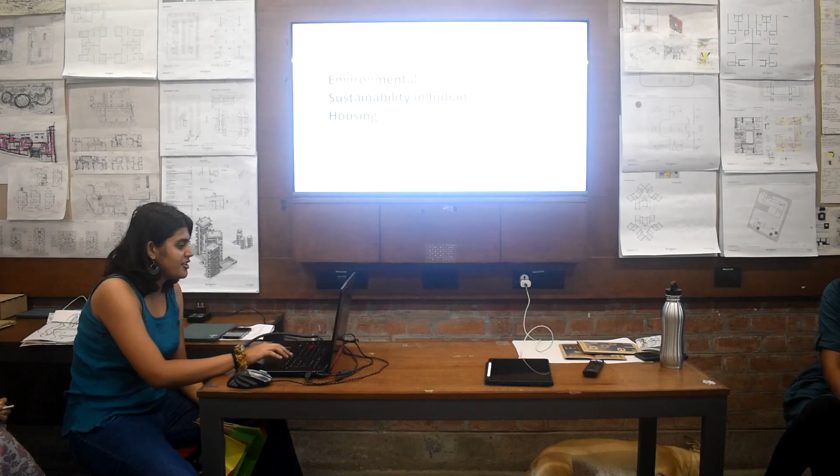Everyone, I'm Sanjana and today my seminar would be about environmental sustainability in the Indian housing context.

The future is back. Architecture, which has been a bit out of focus lately, is once again alert. Sustainability came to the rescue, setting goals, objective tasks and challenges, and the new paradigm is readily absorbed. Architects can save the world again. They advertise their sustainable practice and ecological design. Schools offer master courses in sustainable design, while the building industry provides sustainable solutions and governments compete in a contest of sustainability politics. Sustainability has become a politically correct term, a label that makes whatever you want to do acceptable and good. No question asked and no doubt involved.

So when we look at housing in specific as a building typology, we have three stakeholders in any project: the client, the designer and the end user. But in terms of housing, we have the developer, architect and resident.

What is important in the case of housing is the relationship between these different stakeholders, because say for example in a school or a museum, the end user does not associate the project as home, or it is not so sacred to them. But when you talk about housing or a home, it becomes more important, because for the end user, the resident, they are buying a commodity of an apartment or a house for themselves.

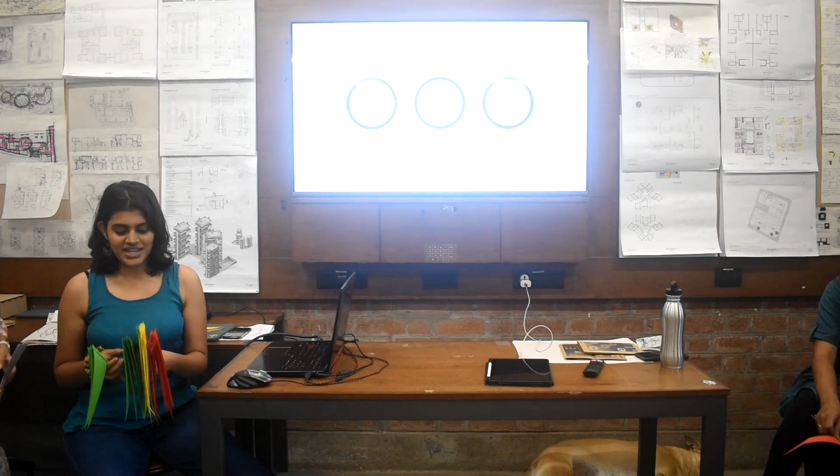So for the sake of this presentation, I would like you guys to align yourself with either being a developer or being an architect or being a resident. Just take one and pass on each color.

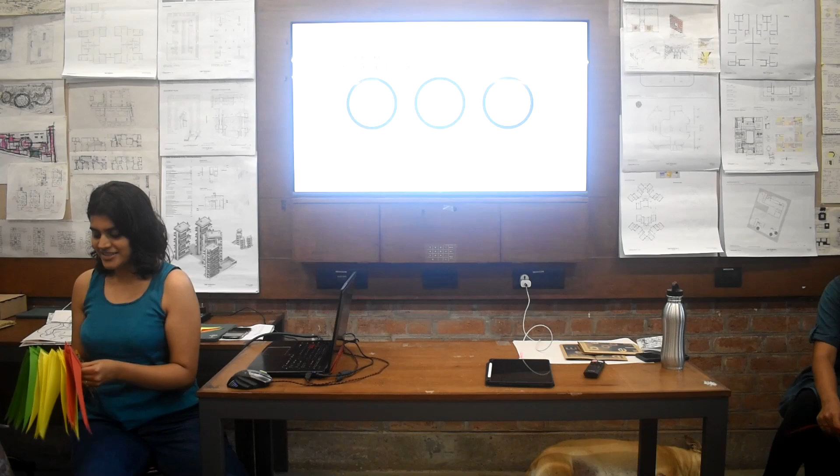And what is important is, when you think like a developer, you think like a business person. It is your business that is going to go into loss. It is you who is going to face the loss and the profit. Can you take one and pass? And you need to have one of each color.

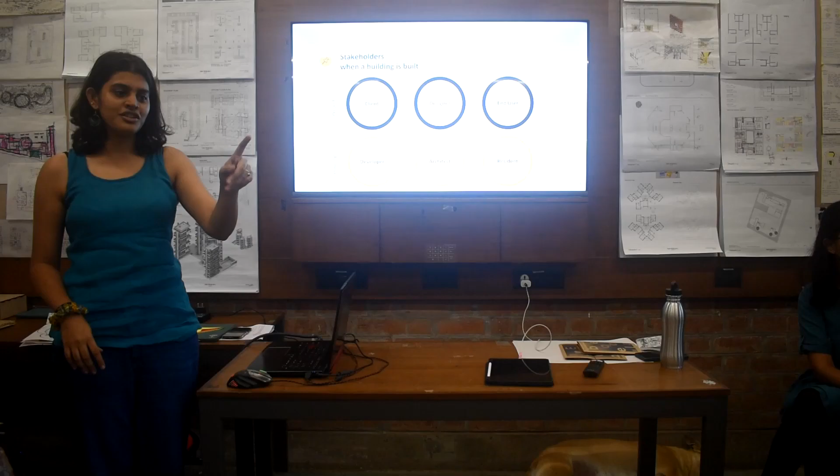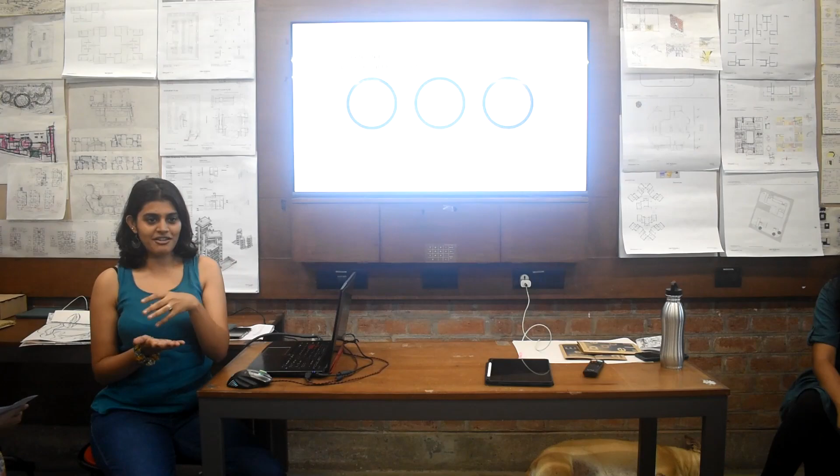When you are an architect, one of each color. When you are an architect, you are thinking as a designer who is designing a housing complex. And as the resident, I want you guys to think as the closest non-designer family member you have. So say your parents or your grandparents or your family members, and if they would be okay with this idea of sustainability.

What is your role? A developer is typically an individual or entity responsible for the financing and overseeing of a project. An architect is someone who designs buildings and structures that are not only aesthetically pleasing but functional, safe and in compliance with regulations. And the resident refers to an individual or family who will eventually live in one of the housing units. So for example, if I have bought a house in Omaxe Heights in Lucknow, Omaxe Construction is the developer, CP Kukreja is the architect, and I become the resident or the end user.

When we look at environmental sustainability in an Indian housing context, to make it a success, there are three basic criteria that it needs to fulfill. The practice or the system needs to be environmentally sustainable, it needs to be economically viable, and it needs to be socially acceptable by the three different stakeholders that are there.

If there are less number of flags, we can share.

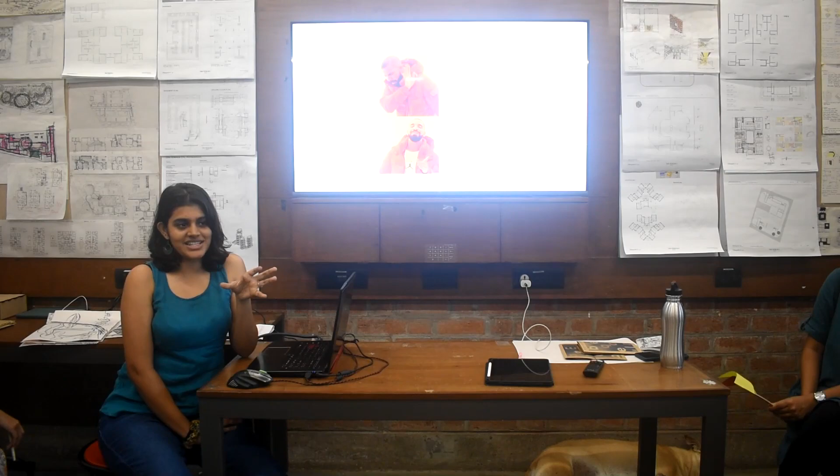When we talk about social acceptance, how the residents look at social acceptance is very different from how an architect or a developer look at social acceptance. So for example, for a developer, sustainability has become like a replacement of an amenity, or it has become like a selling point of a project. While as architects, we feel that sustainability is something which is either too serious a topic to deal with, or a topic which makes us more morally correct or politically correct. But when we look at the resident, we're not sure if they really agree to or they care about sustainability or environmental sustainability, specifically in the housing context.

When we talk about economic viability, this is just an example. So 40,000 to 70,000 per kilowatt is the price for installing solar panels in a housing complex of 50 units in India, and we produce about 1 lakh to 3 lakh kilowatt hours per year.

So when we look at economic viability, the developer is financing a project, and the resident is the person who has to take care of the maintenance of the system, or the cost efficiency when it comes to repairs or damages of a sustainable system, while the architect is of course someone who's designed the system but is not economically affected by it.

These are just types of certifications in India that we follow: the IGBC, the GRIHA, LEED, or ECBC system, where buildings are given points according to different sustainable ratings, and then they are certified based on how many points they collect.

So now I will be showing you three different projects, and I want some of you all to do the role play of a developer. So can I just have a show of hands of how many of you all would like to look at these projects as developers?

Okay, as architects? Okay, and as residents? So again, just a reminder: when you're thinking like a developer, you think about a business person and not about the aesthetics of the building, if you want to. As an architect, you think as a designer, someone who's designing the project. And as a resident, you relate to the closest non-designer person that you know.

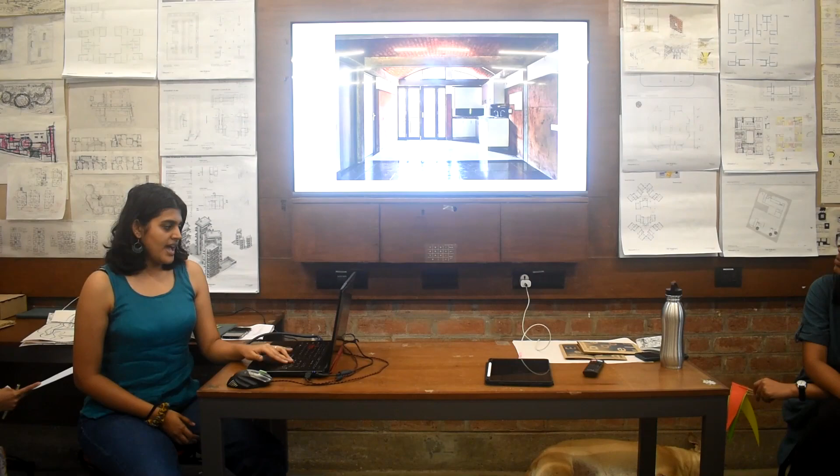This is Humanscape in Auroville. It is a non-certified sustainable project that has integrated urban living. It is a mixed-use development that uses a lot of passive techniques and technologies to promote sustainability. It deals with a good water management system, and apart from environmental sustainability, it emphasizes social sustainability, where the house dwellings do not have private bathrooms, but have more common spaces. There are a lot of common community spaces. For example, a 4 BHK in this project has 2 common toilets, and no individual toilets attached to the bedrooms.

So for this project, if you are aligning yourself as a developer, these are the probable key points or information you should keep in mind if you are saying that you would build this project. A green flag is a yes, red flag is a no, and yellow flag is a maybe or ambivalent.

So as a developer, you would get awards and recognition in Auroville, higher profits for the context, but some residents might question the lack of certification, and you would have to pay 15% more construction costs without any certification from the agencies. So as a developer, would you build a project like Humanscape?

Right now it's just developer. You're asking developer? Yeah, as a developer. Are there any green flags? No.

Okay, as an architect, would you design a project like this where you would get awards in addition to your portfolio, moral fulfillment of responsibility towards the society?

Okay, any red flags? So you wouldn't design a project like this as an architect? You are trying to influence it.

Okay, and as a resident, you would have to pay a higher price of 10% for a non-certified sustainable project on the word of the developer and an architect. There would be a 4 BHK with no attached bathrooms, a lot of shared amenities and community spaces, and maintenance charges, etc. So would you buy a house in a project like this?

Are there any green flags?

The next project is Park West by Shapoorji Pallonji. It's designed by RSP Design Consultants, in Bangalore. It is an IGBC certified sustainable project that uses a lot of energy efficient systems and a lot of green pockets and sustainable materials so that the embodied energy of the building is lower. It also has amenities and shared spaces, with a lot of green pockets to reduce the heat island effect in a city like Bangalore. It is also deemed to be the example of a sustainable project in the cityscape of Bangalore.

So as a developer, would you build a project like this? You would get higher profits for a certified project. You would have to pay 5% more of the construction cost for the process of obtaining the certifications, and there would be awards and recognition for doing a sustainable development in Bangalore.

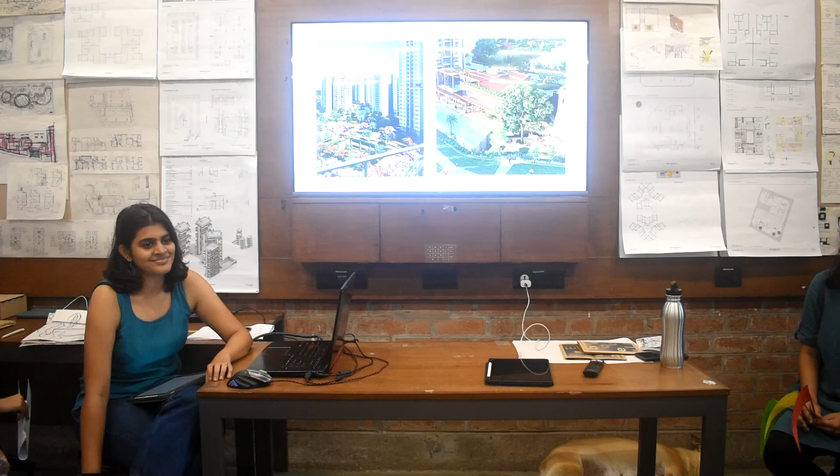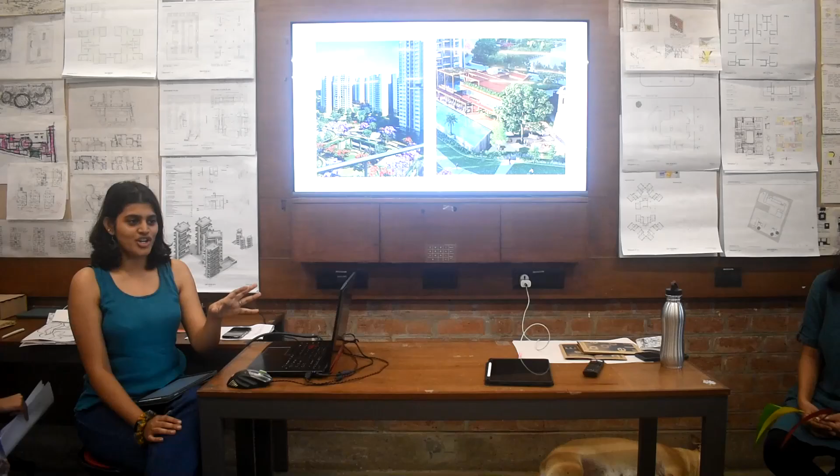So I had also done a survey about whether people would be okay using grey water recycling to wash their cars or water their plants. Every non-designer I asked would not be okay with it. In fact, when I told my father, the closest non-designer resident I know, he was absolutely against the idea of recycling grey water for washing the car or watering plants. So I think as designers, the way we look at sustainability, or the tangible systems we might be okay with, a lot of residents do not think about it that way, because they are paying for a commodity of a house or an apartment. They look for their comfort, or what they're getting out of it, at the topmost level of priorities.

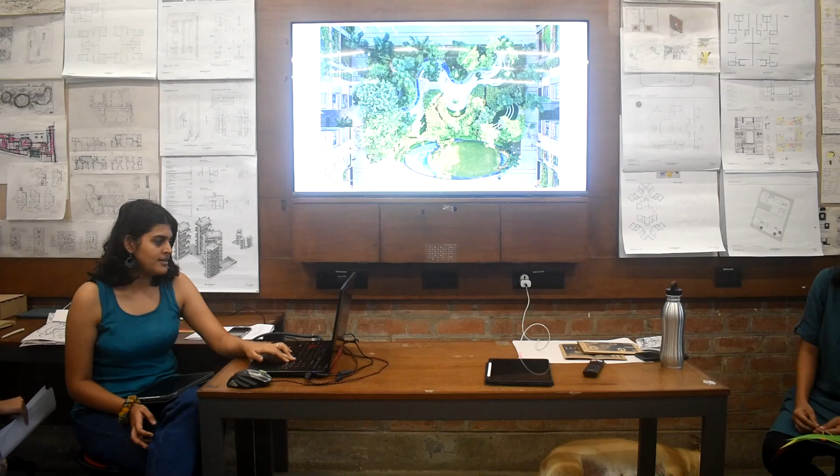This is the third project, the Urban Oasis in Ahmedabad, by Grid Architects. This is also an IGBC certified building, and it endorses and encourages community living. At the same time, it reduces carbon footprint and uses a lot of energy efficient systems. It has four blocks: north, south, east, west. The north and south blocks are the taller blocks, and the east and west blocks are comparatively shorter. Right in the middle of these four blocks there is an ecological garden that they have maintained, with all the native tree species of Ahmedabad. On a normal day, on a silent afternoon, you would hear birds chirping and water trickling down the stream that is there.

So for this project, as a developer, would you build a project like the Urban Oasis? As an architect, would you design a project like Urban Oasis? And as a resident, would you buy an apartment in a place like Urban Oasis?

So the percentages are different in different projects. Yeah, it's also based on the scale of the projects. You wouldn't buy - yeah, 25%. Why wouldn't you? It's 25% more than... yeah, it's 25%. I don't care so much for the environment. So why wouldn't you buy? Is it because of the cost?

It's first of all because of the cost, and even in spite of the cost, if I buy - if I'm having to use grey water to wash my cars and use in my toilets, and when my guests come in and ask how's your building sustainable, I have to say I'm not buying a project at that high a price for that. Paying 25% extra to wash with grey water - first give more money, then use grey water. With 25% extra, I want distilled water, RO water. There are people who use RO water for their cars, because you get sedimentation if you wash with hard water - you need RO water. If I pay, that's what it is. I'm paying 25%, I better get RO for my car.

What apart from that, ecology? There are water management systems, rainwater harvesting systems, and a lot of solar panels that they use on the terraces.

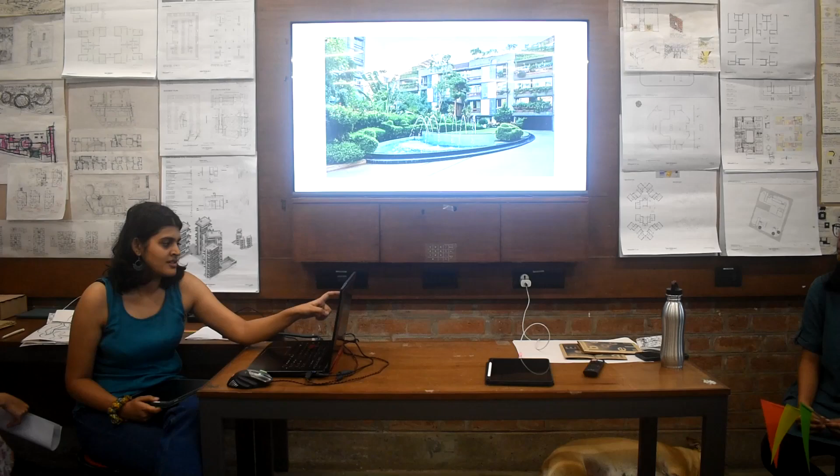Then why are you just talking about ecological garden when you are telling us? No, I said they use other sustainable systems. Also because of the ecological garden, they advertise their building based on that ecological garden. They were selling it as sustainable. Maybe these are the ones who will buy for sustainability, they know what sustainability is. Then maybe they will check all the parameters. If I'm that educated that I know what sustainable is, then I won't fall for the trap of an ecological garden, no, to the materials. But actually these are also sustainable. And you need to tell me, I don't know.

So why I showed these three different projects and why we had a difference of opinion as a developer, as an architect and as a resident is more complex than just a definition of sustainability. Even as designers, we can never end up on the same page for sustainability because it is a plural concept. Not just in terms of textbook definitions of sustainability for architects, but also the different stakeholders involved, especially in a housing scenario, because there the architect plays a much less role as a stakeholder than a developer or a resident does.

Even when each of us would try to define sustainability, we would never end up on the same page because it is a never-ending debate. And maybe it is good that sustainability does not have a fixed or coherent definition, because if the technical question of energy efficiency or the technocratic questions of efficient resource use or even the questions of socio-economic management end up constituting the definition of sustainability, this will threaten to reduce design to a series of small decisions that will ultimately have less to do with design and more with the management or with the political correctness of sustainability. That's it.

Probably because of monotony and they look banal, or how visually the building is looking. But apart from that, Urban Oasis sort of finds a middle ground between Humanscape and Park West, where it is a commercial building. It is where the residents are purchasing a certified sustainable project. But at the same time, it is not a commercialized sustainable project.

What I find interesting also about Urban Oasis is that while they publicize the project, they do bank on the LEED certification to project the image, whereas they also did some other measures like the grey water and also all the amenity spaces, the parking is in the basement, and their entire space is a non-parking zone, like there's no cars that enter it. So these parking spaces, these areas also have amenity spaces. So even in the heat of the sun, it is actually very cool in the ground floor places. And these are, I would hope at least, spaces that people would expect or want to live with. But it's never publicized from a design perspective that they have designed to make certain things like this in mind.

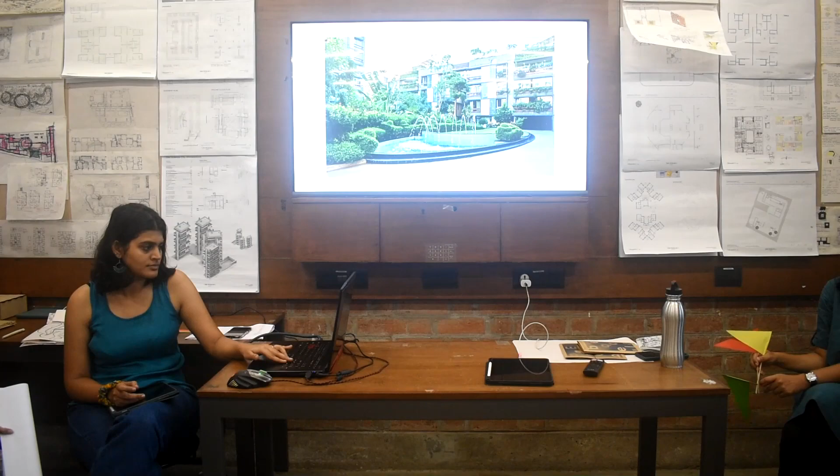But I think there was also a problem where they stopped it at the 4th floor. I guess initially the plan was for this horizontal building to go up to the 7th or 8th floor, but then that came down. If it had gone to what was planned initially, I think we'd be voting for the visual of it rather than the sustainable part of it.

Also, I don't know if you know the project Good Earth Malhar from Bangalore. That's a project where what they're trying to do - I don't know the exact expanse, but I think it's situated on 50 to 80 acres of land. They have bungalows there, which is a totally sustainable project. But then at one point they introduced high-rise buildings, and those apartments are using that FSI, so they're basically trying to make it commercial.

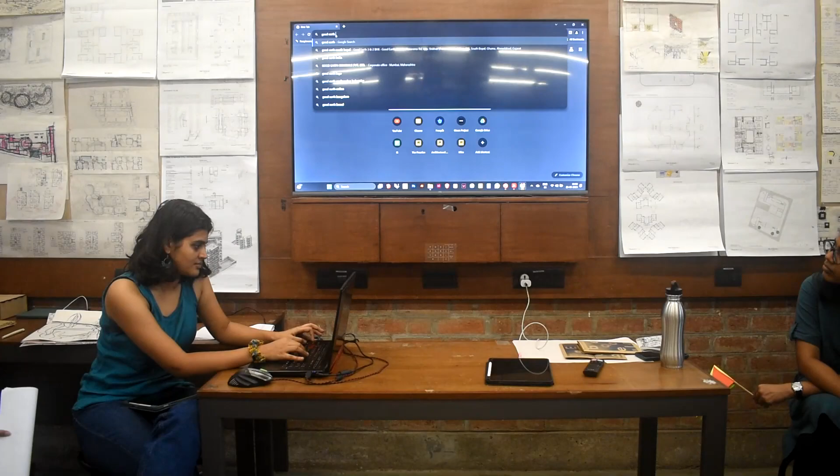Good Earth Malhar. How do you spell it? Good Earth. G-O-O-D. Oh, good. Malhar, M-A...

This is the building, yeah. This is, I think, the main entrance of it. But if you go inside, it will have the pathways, and that's how all the houses are connected. All of those bricks are also built on site. Also, all of this grey water and everything, they're ready to use it, because the clients, the people living in these houses, were actually interested in buying this kind of houses. So that is where I think it actually works - where community comes together to say that yeah, we are interested in doing this, and then they use it.

But I think putting it onto large scale projects is difficult. There is also a building for that - an apartment. In the same campus, there's Terraces, just like terraces, an apartment complex.

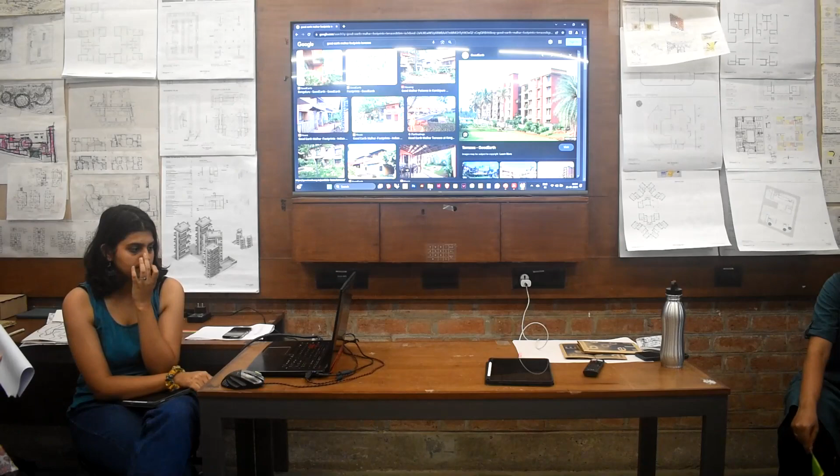So when you're asking this question of cost, since you're talking of it for both the developer and the user, take something like earthquake resistance. Before 2001, at least in Gujarat, people were not very particular about it, although it was always in zone 3. But after 2001, everyone became particular about it. Now, earthquake resistance comes at an additional cost if you want your buildings earthquake resistant. No one is asking, neither the developer nor the end user, to not make it earthquake resistant and reduce the cost by 5%, right?

So I think it's important to discuss when do people start, for what things do people suddenly start becoming cost sensitive? Because there are a lot of things for which people just accept that this will be an additional cost and I have to bear that cost.

Like in Ahmedabad, for a long time till Narmada water came, everyone was digging bore wells, and we reached a stage where bore wells were going to crazy depths. You have to pay a huge cost for not only digging the bore well, but the submersible pump and electricity costs are huge. No one was debating that additional cost. So I think we also need to ask why it is that when it comes to sustainability, we suddenly become cost sensitive.

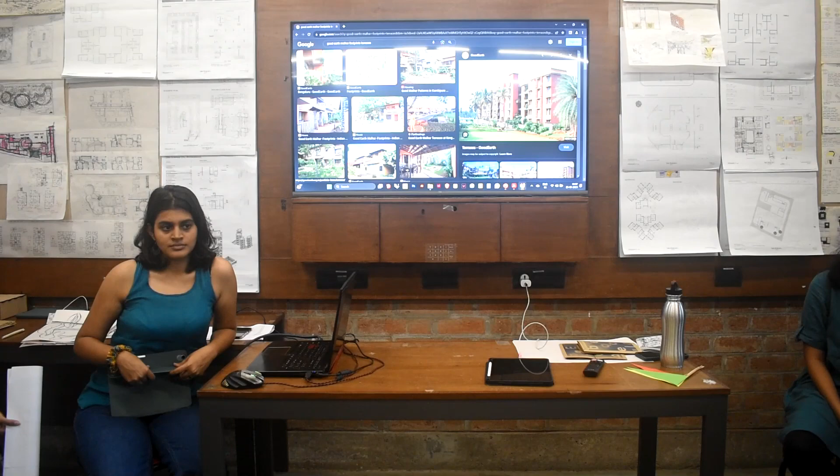When you were showing us this scheme, your focus was on the preconceived notion that if you want to sell property, you have to show amenities. But if your motive is to educate people that we need sustainability, should not your advertisement also reflect that? This is a huge cost. Even my apartment has a borewell which adds to maintenance I'm paying. But if I advertise it like, I'm saving water for the year because of rain, I'm still using money for water. You're selling sustainability immediately. If you believe sustainability is important, should not your advertisement also have that?

I don't think I was trying to advertise any of these projects, I was only showing amenities. When you see a dwelling unit, even in a sustainable project, if there's recycled grey water coming into your tap, you can't see that system. It's not a very tangible system of sustainability that someone faces, it's a building level system. For example, in the ELN project shown, they were also advertising peace and serenity, which you also cannot see. Still they were advertising it, even showing Buddha or that Japanese bowl. So intangible things are also advertised.

If I may interrupt, the clients understand the language of amenities and they buy houses looking at amenities. Talking about the urban oasis project, even the brochure was attracting clients by selling amenities, and sustainability was mentioned somewhere in the brochure, but the end user understands the language of amenities.

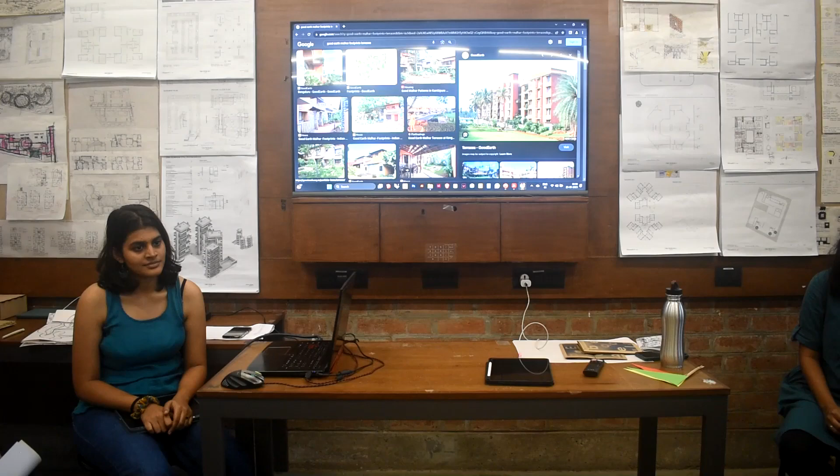As marketers, we need the people staying here to be conscious about that. Why can't the sustainability thing become an amenity itself? Why don't the advertisement people understand that? Because that language doesn't sell. So how do you sell that 25% extra which you are paying? Because the amenities are seen as common throughout, so where is that 25% coming from?

How do you explain that 25% to the client? If I don't explain to them the sustainability, all the systems they are using, how will I sell it? I won't get 25% just for a garden.

Of course not, but the point was never to explain the systems. For example, if I go to explain the entire grey water recycling system to a non-resident, not all of them will understand it. It's only when a resident specifically asks that you explain it and endorse the whole system, telling them which tank is where. Usually what you sell is something tangible, something they can visually see and experience.

To a non-designer, if we start thinking this way, in your presentation itself you said the difficulties are lack of knowledge and lack of awareness. So the minute we also start thinking this way, the knowledge and awareness will never spread. I am the one who should spread the awareness.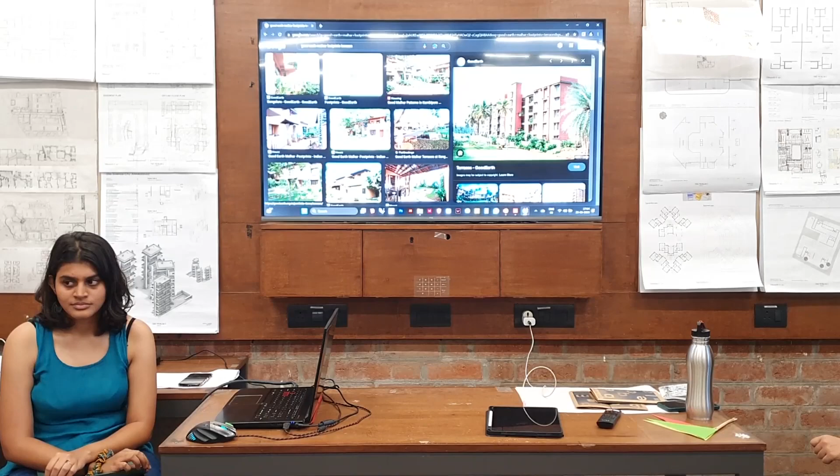Talking about grey water being used, for example. I think there was an STP made in our buildings, but it was not functioning when we asked the secretary about it. So once the management is given to the society, sometimes things don't work.

What do you personally think is sustainable, according to your own definition? I don't think I have an answer yet. I don't have an answer.

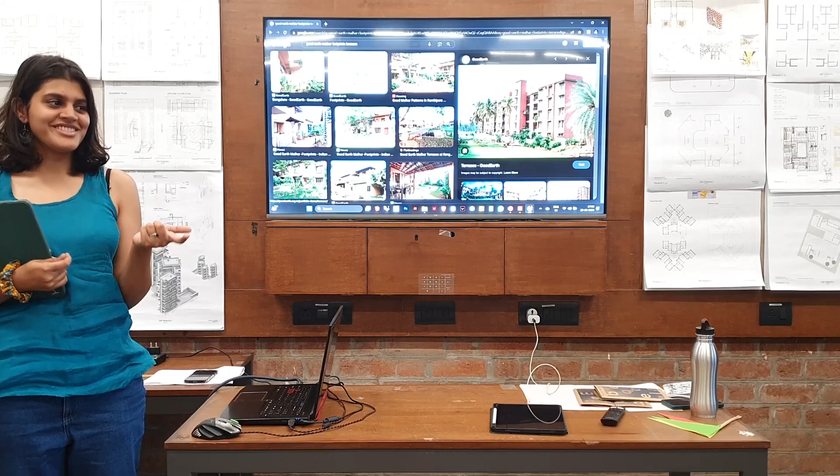But I think the closest thing I have come across is the responsible use of resources. Responsible use of resources.

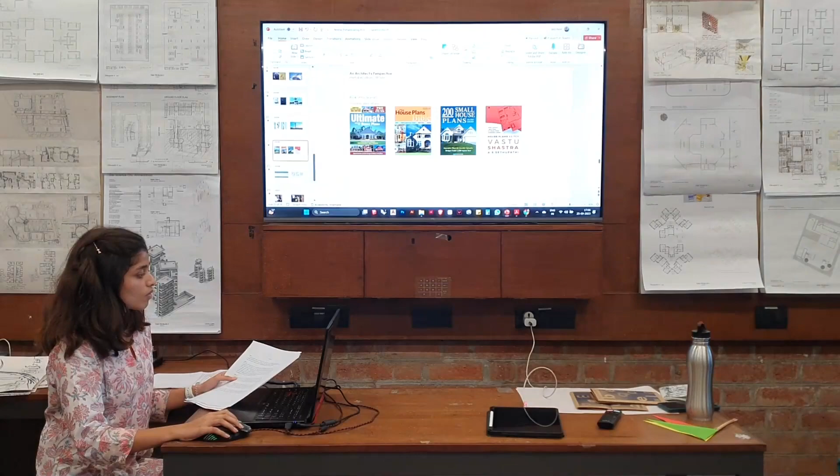The age of the machine was a transformative era that unfolded over the late 18th and 19th centuries, ushering in a new age of innovation, industry, and progress. There was a clear shift from products to processes, and an atmosphere of doing more with less—less investment of man, material, and making time. This shift mainly brought about a rise of mills and factories, which in turn brought about a massive influx of people to cities, placing new demands upon urban infrastructure. Small towns turned into cities, and cities in turn swelled. Hence grew an imminent need to house not just the production but its producers as well. This need for faster infrastructural development led to the eventual industrialization of the building process itself.

The first call for industrial housing came about in Europe and the United States between the wars. Architects experimented with concepts of mass housing based on standardized components, and thus prefabrication made its way into the housing industry. A few examples include the Dymaxion House by Buckminster Fuller and the Packaged House by Walter Gropius. In the Indian context too, industrialization of the building industry emerged in the later 20th century with the Hindustan Prefabrication Limited, a solution to the housing crisis that arose from the Indo-Pak partition.

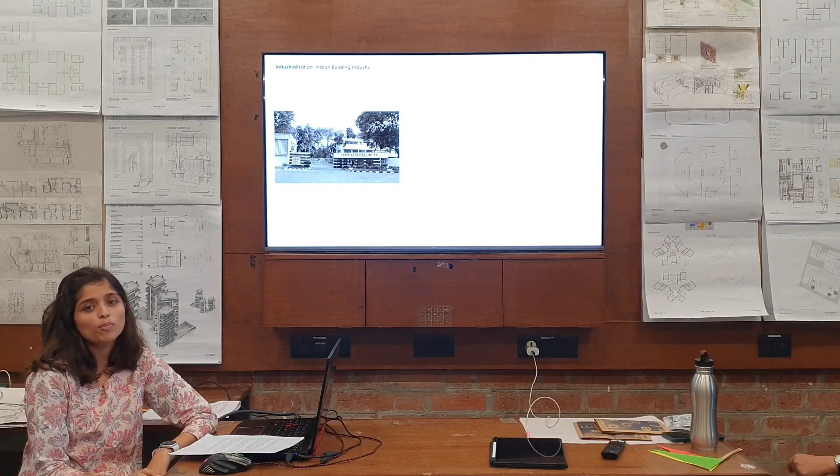While prefabricating in a controlled factory environment does ensure quality, faster and efficient construction planning, and low maintenance, why does the construction industry in India still have such a grim face? Be it abandonment of ongoing construction sites due to periods exceeding project deadlines, structural durability problems pre-occupation, or very high maintenance post-occupation, there is clearly a need to shift from on-site construction to off-site prefabrication. Why then is prefabrication still not being accepted in the housing industry of India? Is there a need to define prefabrication so as to evaluate its role in construction, and to develop a greater understanding of this term so it can make its way into mainstream construction? Hence, my first question to all of you: what is your definition of prefabrication? Here are two images for your reference.

So yeah, if anybody from the audience would like to answer this.

Prefabrication is almost like a game of assembly and disassembly, where these components are made at the factory off-site and then brought to site and assembled to make the structures.

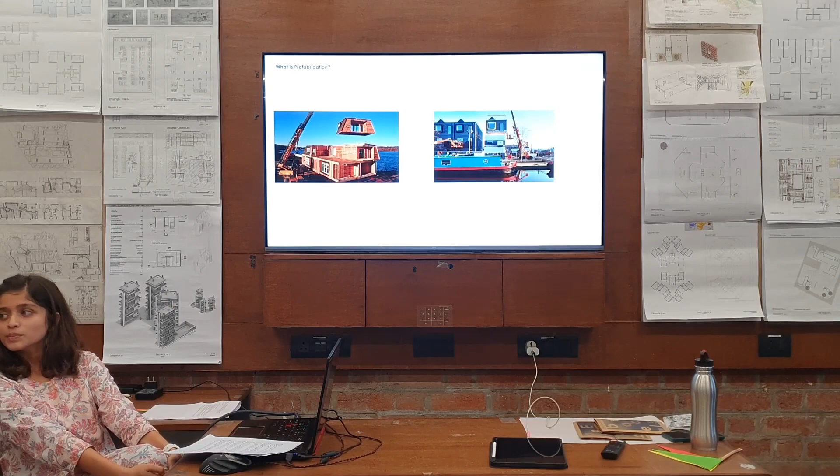Any other answers? I think it's also basically a construction method of assembling manufactured entire building components like floors, walls, etc., and then assembling them on the construction site.

It also extends to predetermining certain factors that you're anticipating would be required in the construction, for different reasons like economizing labor and time of construction.

Any insight from the master's batch? What is prefabrication for you? Everybody?

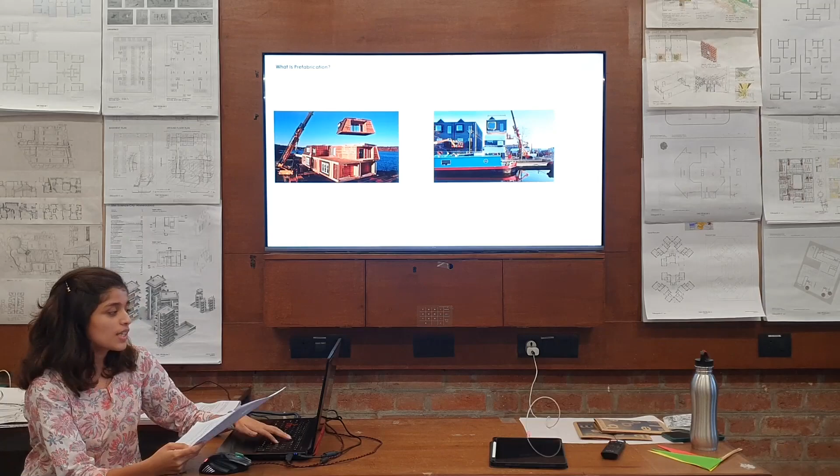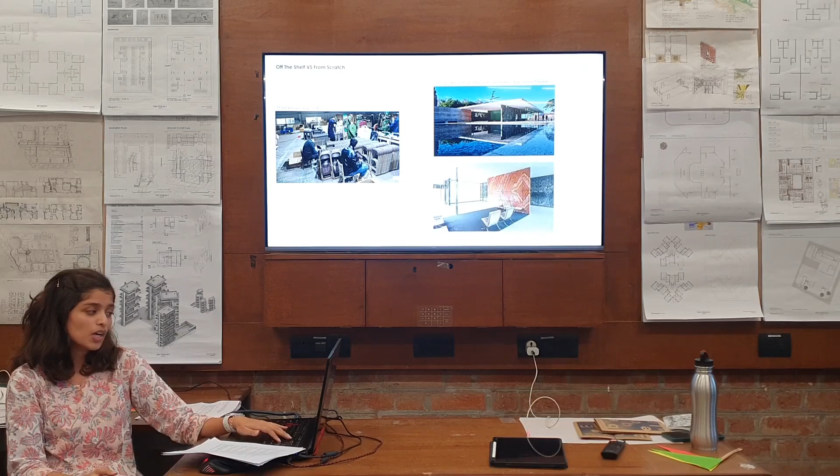Another example: on one side you have chairs mass manufactured in the factory, while on the other side we have Mies, who went all out in his design process and realized the bigger idea of the Barcelona Pavilion, even in the chairs that went into the making of this place.

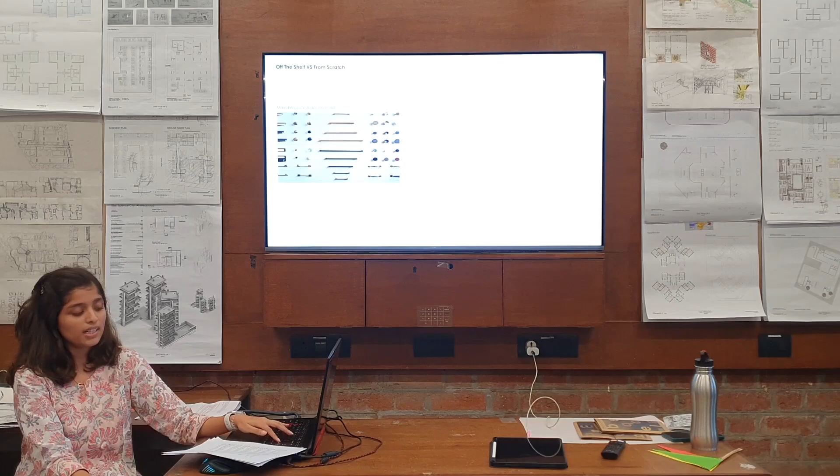Not just chairs - take door handles. On one side we have a rich, diverse collection of door handles, different shapes, sizes, colors, textures, to fit the theme the architect has in mind. On the other end of the spectrum, we have Zaha Hadid, who put forward an entire line of door handles called the Chevron, custom made for her building at the New York apartments.

Another example: on one side we have a door handle factory making its components, while on the other side we have MAD Architects, who carried forward the formal inspiration they had in mind for their Absolute Towers even into the door handles that went into the making of this project.

So now I'd like to put forward another question. Can an architect take up roles beyond architecture? Is there really a beginning to architecture, and is there really an end to it?

Are you asking, should architects also design door handles? On one side, as you saw, there was an architect picking up a door handle from a shelf. On the other side, you saw Zaha Hadid designing the door handles for a project.

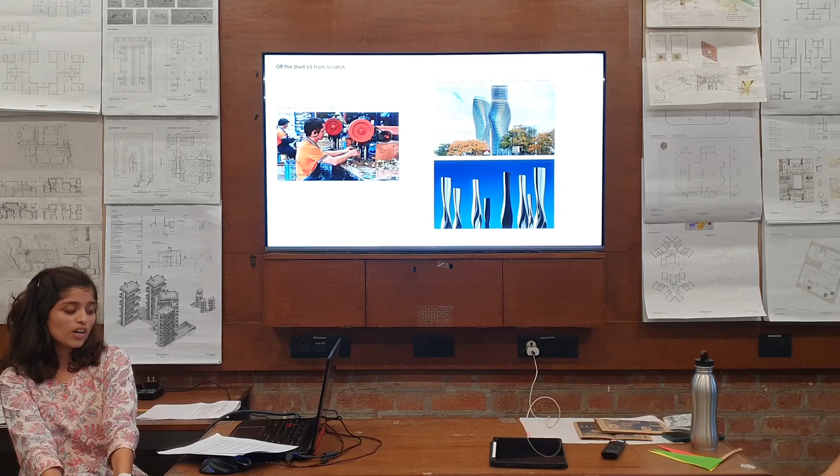So do you think an architect goes beyond just doing the architecture and should also concern themselves with designing the door handle of the project? Does it add any value to people? That's the question - does it add value to the project? Does it add value to the role of the architect? My question is back to you - does it add value to the project itself, to people's lives? What do you say?

But if you take the example of door handles, it's more about utility. But then I think it becomes a bigger question of how important is that door handle compared to this big tower that is outside.

I have a question for that. If there's an ant moving here, and I scale it down to, say, 1 to 0.01 and stretch that ant to that level, will that ant still function on this surface? No, it won't. So basically if I'm making that building - not talking about the previous case - if I'm taking the same structure of the building and converting it into a handle, there's a different complexity that goes into both of them.

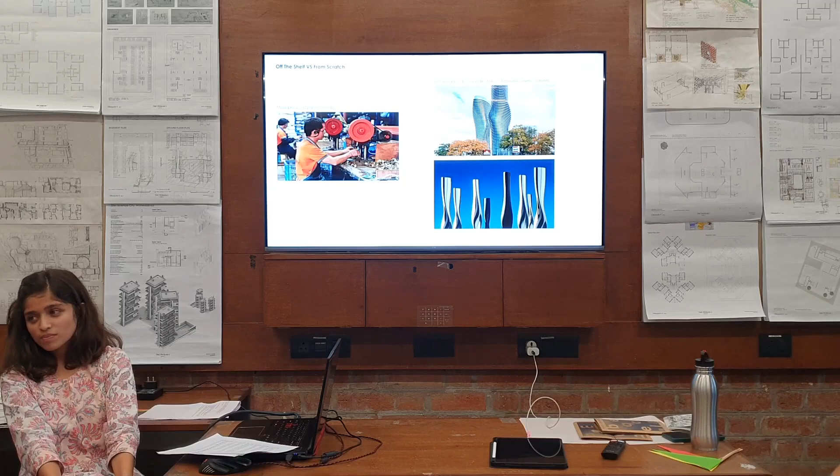So you're trying to say you won't do it like this, but I think the question she's asking is, should an architect design a door handle? Yeah, they should. That's the question she's asking, not this specific door handle.

I also think it depends on which architect is designing the door handle. If I designed it, I don't think people would care. But if Zaha Hadid is designing it, I'm sure they'd be like, wow, what a door handle.

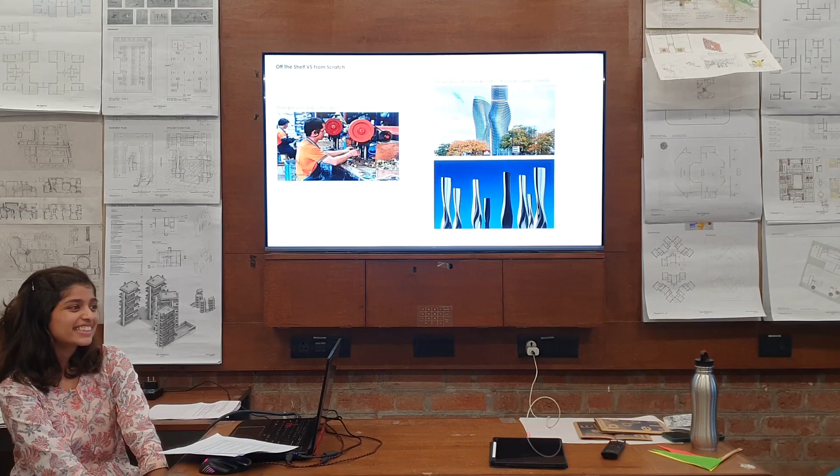Of course, but I'm saying there is also a name attachment to the kind of furniture that is made. Also because it is one of a kind, but also because, say for example, the chairs in Barcelona Pavilion become special because they are in the Barcelona Pavilion or because of who they are designed by.

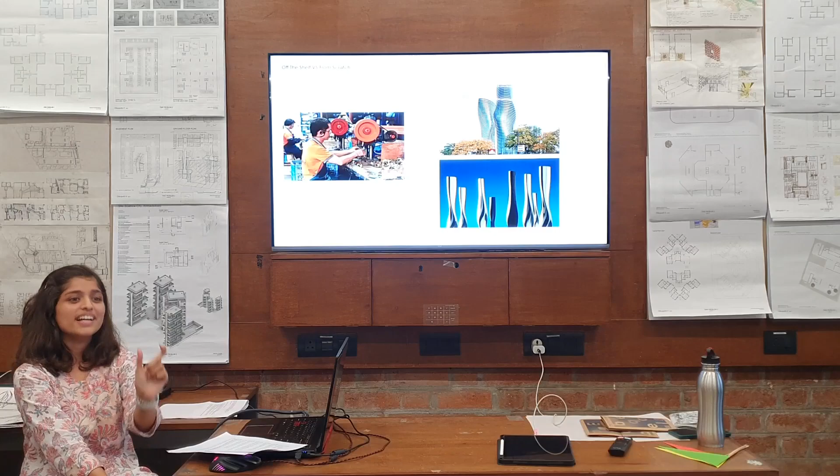But maybe the intention is not to control it, but to start the initiative, like for example the handle does not restrict, it's not doing anything restrictive from a normal design. It's just that you are starting the initiative of doing that handle. So more than controlling, it's you carrying forward your strong concept to the end detail in your project. I guess then it depends on the architect. No, I mean if I want to justify my design, maybe not.

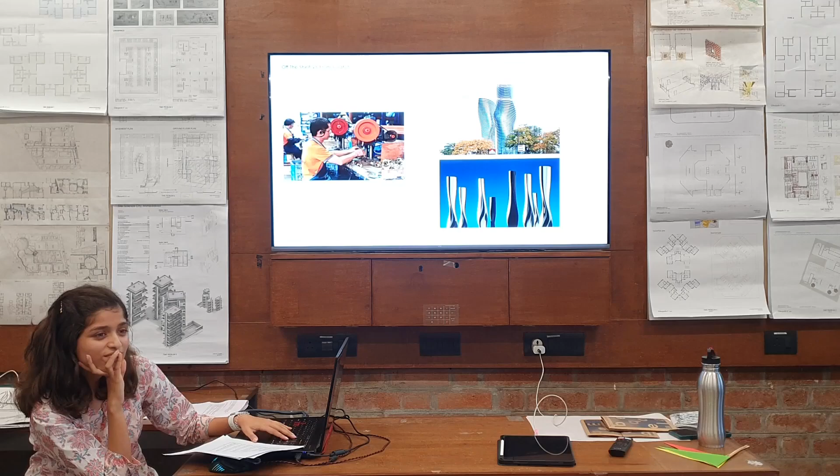Like you said, the example of Frank Lloyd Wright, he even designs the crockery. It then again comes back to that question of what is home - am I giving freedom to people to do whatever they want, or am I designing everything? I think if you give me money, I will design your AC, I will design your fan.

And what if it's your building and the door handle that goes along with the building? I think there is a certain degree of importance that we attribute to this. So then you would say that one might as well realize the idea at a bigger scale and not in something as small and unimportant as this? Is it more about the experience we are having throughout the building? Because these are the things we are actually interacting with, and if they don't support the building that's going on, I think that's where these people find a need to actually intervene and design it. So yeah, we should.

Now scaling up, let me take you towards one of the most basic building units, a brick. Towards the left is the mass manufacturing of bricks in a kiln, while on the right we have the Irish architect couple O'Donnell and Twomey, who gave out even the dimensions of the bricks that line the facade at the LSE building in London.

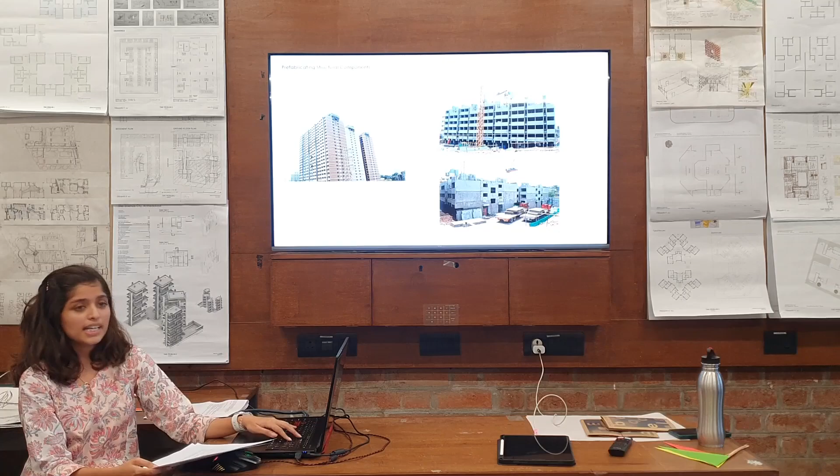Further on, here's an example of the residence named the Lagos House by MAPA, with prefabricated concrete beams and columns that are brought to site, lifted off the cranes, and assembled panel by panel. Steering it back to the Indian scenario, we also have an Indian housing scheme, the SRA scheme by BJTI Architects in Mumbai, wherein prefabrication of concrete panels takes place off-site, and these panels are transported in trucks, lifted off cranes, to be put panel by panel to finish the entire project.

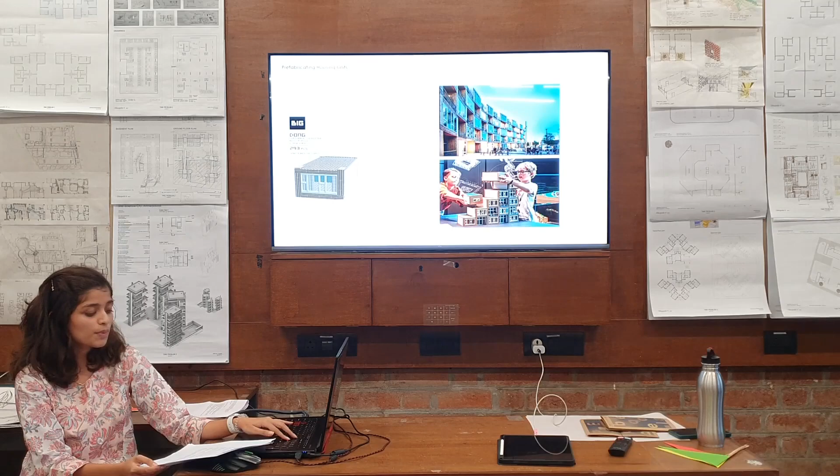So now gradually moving away from building units to the whole building being one unit, we have the Dortheavej Residence by Bjarke Ingels in Denmark. The first image shows the whole housing unit as a kit of parts packed together in a Lego box, while the last image shows children stacking together these units as if it was actually done on site by the architect himself. Another example is the LA Star apartment by Michael Maltzan Architects, a residential housing complex catering to the needs of the long-term homeless poor.

Now individual apartment units are entirely constructed off-site and then delivered to the project via cranes, put atop each other over a structural podium. So now, should you build it brick by brick, or build it before you actually build it?

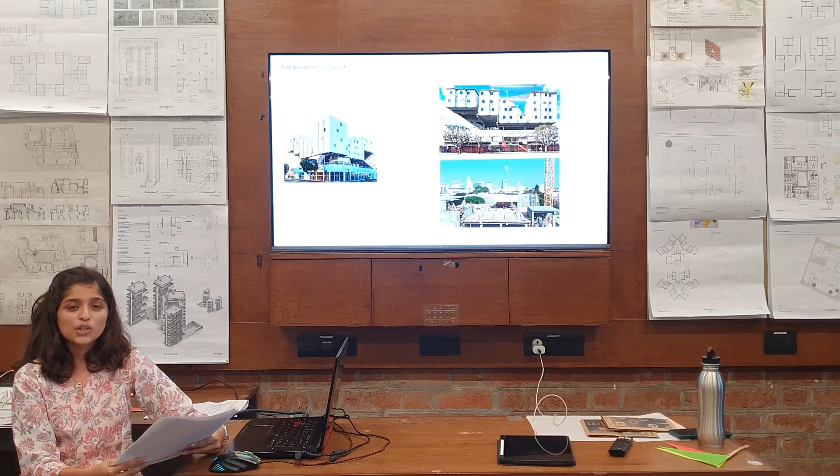Now, if all of these are prefabrications in one way or the other, should an architect pick up a chair, a handle, or a brick off the shelf, or should the same architect design the same chair, the same handle, the same brick from scratch? Do you think there is a value judgment to these contrasting scenarios?

I think it's based on your experience or your skill at doing it. That architect might be skilled at furniture design or product design, so they might do it. If something's not in my thing, I might not do it. So there's no jack of all trades who knows everything, there's specialization for each person. Correct, so I think that's all.

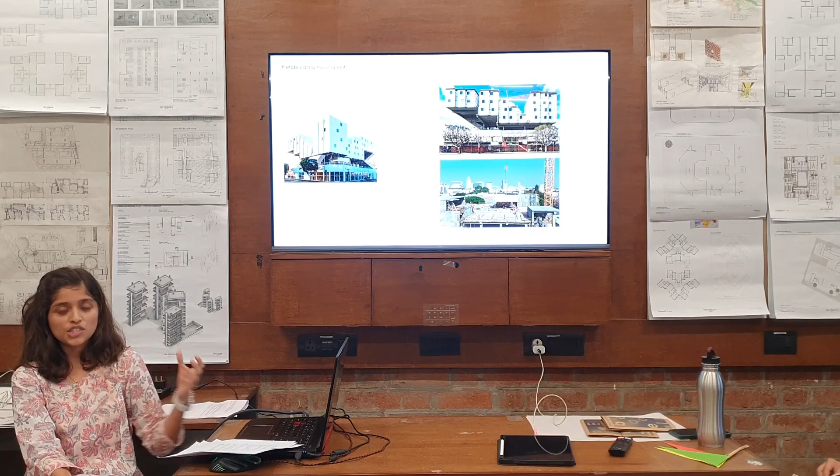Okay, so having time and again compared in situ casting and off-site prefabrication from the domain of civil engineering, I would like to now put forward an architect's take on it. Since prefabrication is manufacturing off-site, then can this painting by Zaha Hadid in the 1970s, made without a single thought about the Vitra Fire Station that stemmed from the same painting 20 years later in 1993, be called prefabrication?

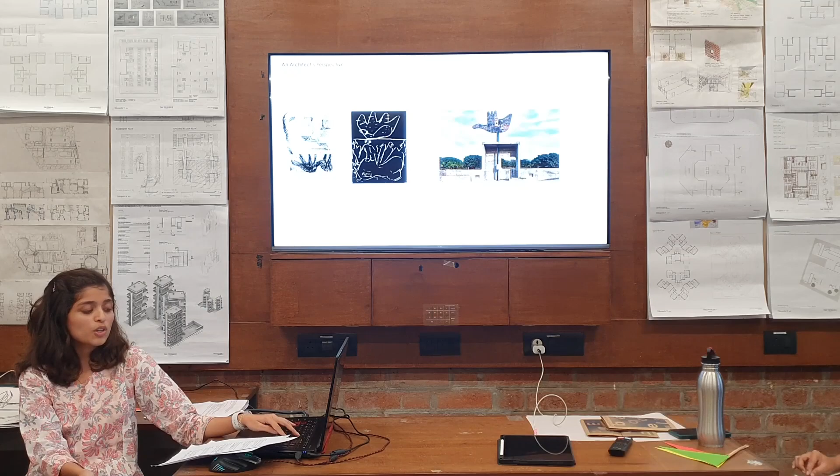Another known example is Corbusier and his study of the Modulor, which contains sketches, one of them being an early rendition of the Open Hand, done in 1943. This same Open Hand was finally realized 50 years later in the Capitol Complex. Now, while studying these proportions, I'm sure Corbusier didn't have the slightest idea of this hand being replicated as one of the most important symbols of modern day Chandigarh.

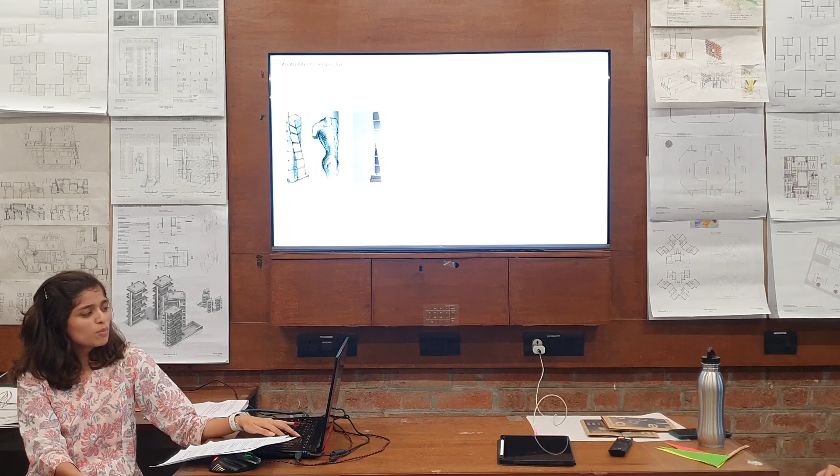Steering it back to the arena of housing, here are books with an extensive collection of plans suiting different plot sizes and family sizes. A few architects in Ahmedabad too have a pre-designed book of plans, designed even before acquiring the site. Not just established firms, but we as students at Oikopolis too have a pre-designed bank of rules, regulations, design considerations, and at times even unit plans designed with a very strong concept before acquiring the site.

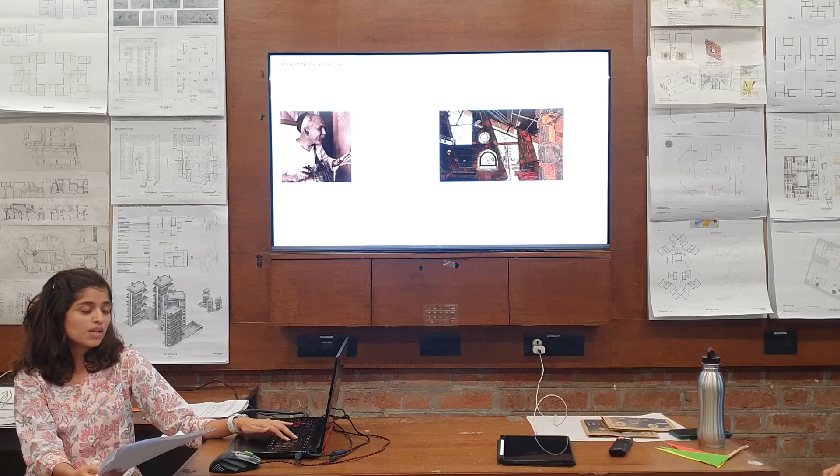Now, if you consider all of this prefabrication, then can a design also be cast in situ on site? For example, we have Nari Gandhi, who put together the entire Jain Bungalow in Lonavala without a single working drawing done before site.

Ultimately, if prefabrication is production in a controlled factory environment, can Zumthor peacefully sketching out his ideas while sitting at Atelier Zumthor be considered prefabrication, while the same architect designing with his client in the studio be called a design cast in situ on site?

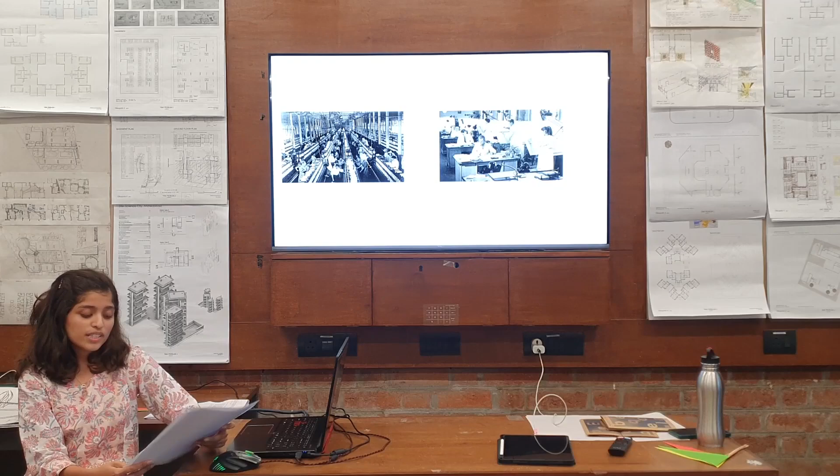Thus, I'd like to conclude my seminar by putting forth my last question for the day, with reference to two images. On the left is a line of workers working on fibers in a factory, while on the right is a line of architects designing on their drafting boards in a studio. So my closing question, or I might call my opening question for today, is: can ideas be prefabricated?

I think they get paid the same.

But you took quite a turn from prefabrication and construction to prefabrication of ideas.

But any responses to, do we prefabricate ideas?

There's no limits to thoughts.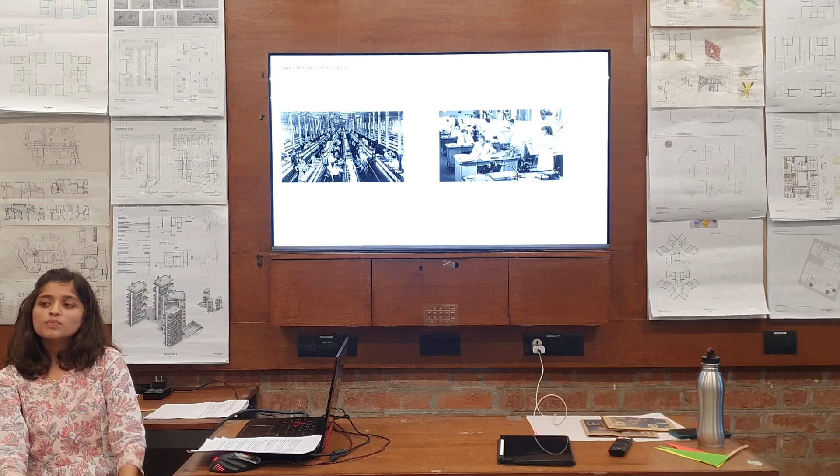So obviously you are actually saying there are multiple ideas probably going on in my head, but it's just the right way of using that idea. You can't just put something into practice because you wanted to implement that idea, there are other factors controlling it. But yes, I agree that thoughts in that sense can come anytime. But at least the examples you were giving, of the open hand or the turning torso, they are quite specific. It's not like Corbusier's Museum of Unlimited Growth, which is a diagram, and the Tokyo or the Ahmedabad museum is a variant of that diagram.

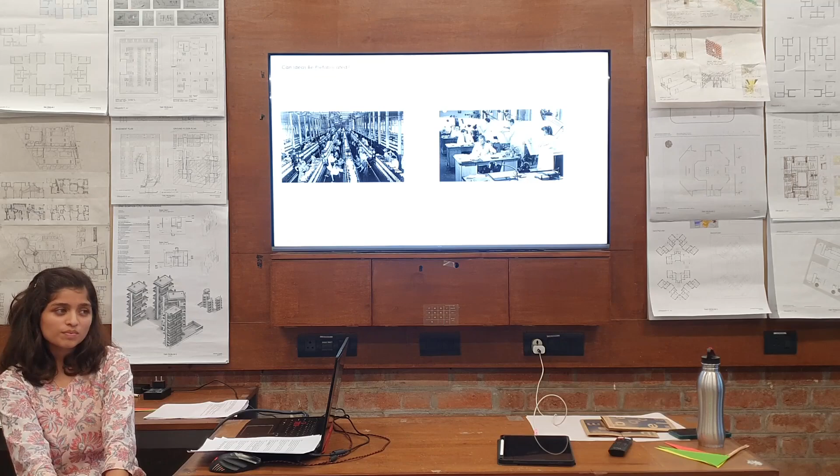We could also ask that question, is that also prefabricated, or is that turning torso, which is like... it seems to be very clear, at least from the two sets of things, that it is exactly the same thing. I think the word is what can be said as prefabricated can be preconceived for somebody.

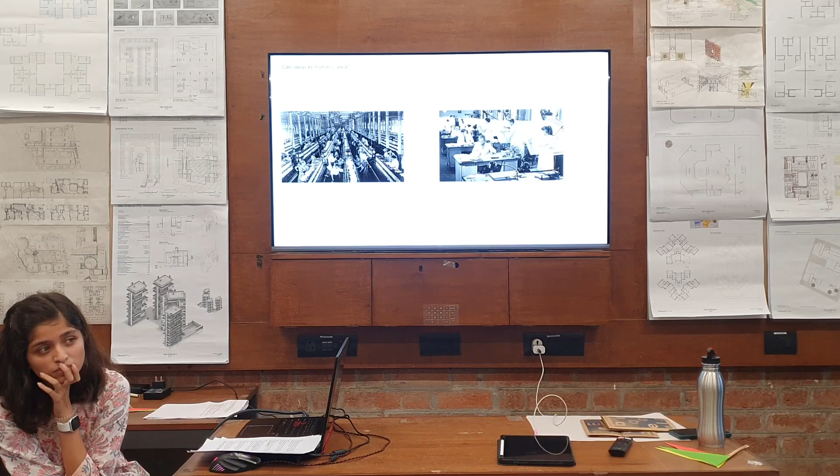But then what if you do have like a really complete vision and you're trying to reproduce it, then wouldn't it be called prefabricated? I mean, obviously the architect's role comes into play when he's trying to put this vision into a site, fitting contextually. So I think that's the whole job of the architect.

So are we trying to also question if prefabricated ideas are appropriate? Because a prefabricated idea would never be contextually appropriate for the immediate context, whether it is there, or maybe the concept was used for something very abstract. So then as individuals, it will determine whether we value that or not. Therefore, we will say whether we will take up prefabrication, and at what level also.

It also depends on - we don't know if Calatrava or Corbusier toyed with the idea of doing that in some other context, but said no because it doesn't go well in the context, or did they not do that? Because you could also have a book of plans, and every time you look at a context, you might be asking, is this contextually relevant to this situation? And if it is relevant, I do it. If it is not relevant, I don't do it.

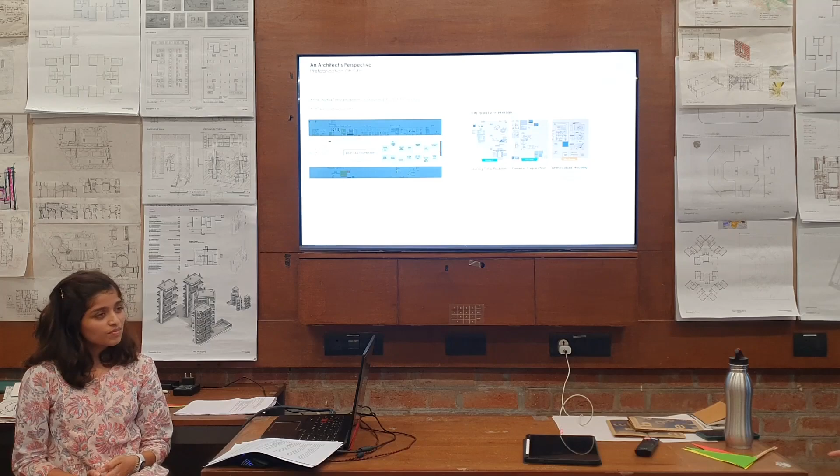People are doing incomplete work - there are other examples also, especially among modernist architects, where they did some projects without a client. They design a house, and when they find the right client and the right plot, of course they're not able to put exactly the same design, but they just use that design. So you are not starting after you get the project. I'm not sure there can be a good or a bad side to pre-designing.

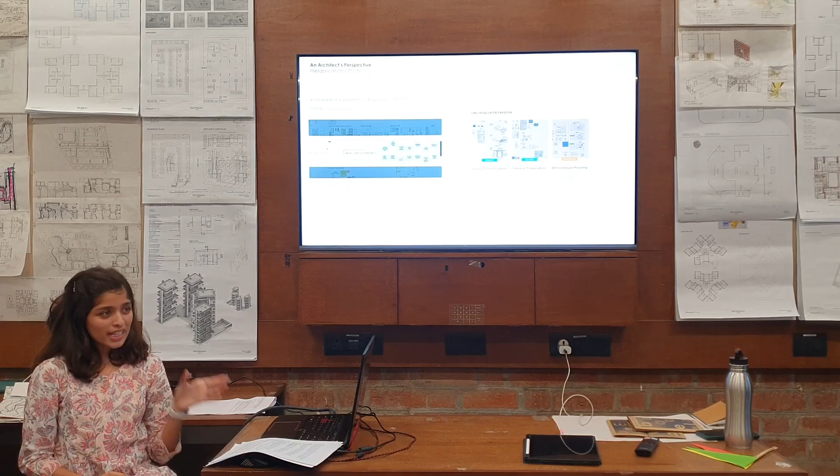I think it's just part of the preparations we undertake. I'm not saying you have to stick to that prefabricated idea. It's fine if it's not working, you let go of it and work on something else. But I think there is a certain presence before.

Is it that for housing this pre-designing happens because it's related to time? Yeah, the time to crunch build housing, it's time-fast, whereas if a museum takes time, it's fine. But I was just thinking in those terms. I remember Gehry, when he designed, at least he said he started by crushing a paper, and that formed the initial concept for the building.

I don't know the timeline exactly, whether after visiting the site he started with this or not. But in a way that is also a prefabricated concept that gets later appropriated, a concept irrelevant of even the program or the site.

I know a lot of young architects starting their practice. When you start off, you don't get enough projects to work on full time, so some people work in other offices. Some people I know just do unbuilt, unfinished, no-client projects. They're just designing because what else do you do with your time?

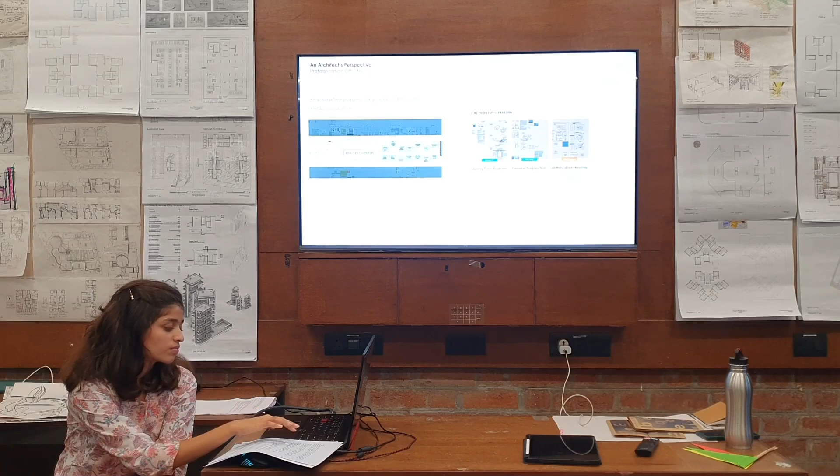Sometimes, like with Calatrava and his Turning Torso, the assumption is that because you're designing without the pressure of a client or site, these become so-called pure ideas. They don't have any considerations of climate, site, project, client, function, or program. It's just pure space.

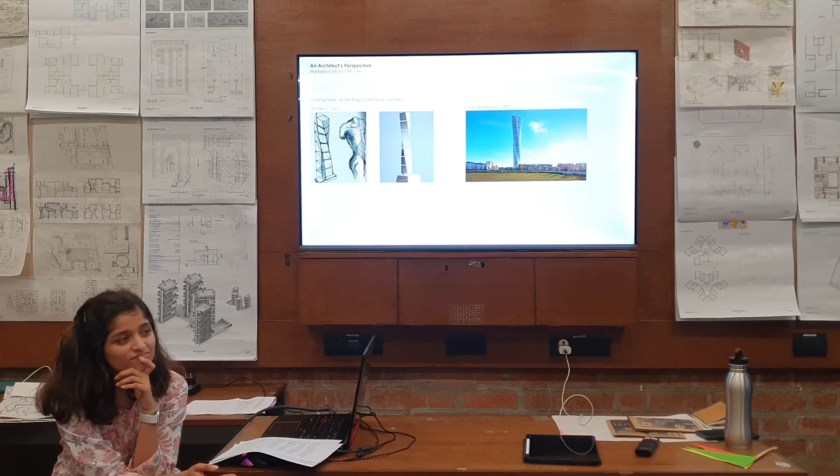A lot of architects enjoy doing competitions because in a competition you don't have a client, so there's a lot of creative freedom you don't otherwise get. Doing a design on your own, without even a competition brief, gives you even more freedom to design whatever you want. Then, 40 years down the line, you look back and think, hey, it's a great idea, why not make a project out of it?

In that way, I found it interesting that, at least in the examples, when it came to a prefabricated building in India, it still looked the same as an in-situ building. But in an outside context, there were different explorations, at least visually, different from what you'd expect given the constraints of client or context.

This ties back to our conversation about studios, that a lot of times architects repeat their concept. Due to a lot of constraints, clients or something, they don't get to work on it as nicely as they would have liked, so they do it again in a different way.

Even if there's no client constraint, if I look at Frank Lloyd Wright and all his prairie houses, what would you say is prefabricated? He's already saying all my prairie houses will have horizontality, sloping roofs, windows in the corner. So parts of it are already pre-decided for that context, and then his Usonian houses are a different idea. In his case, he's doing it even without client time pressure.

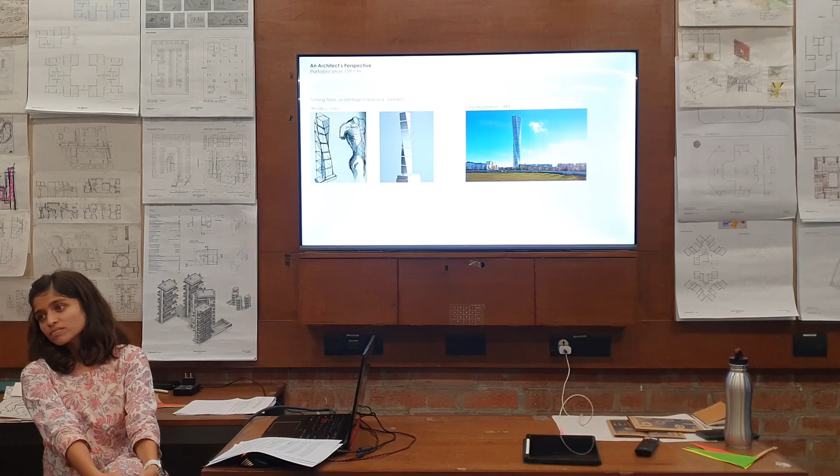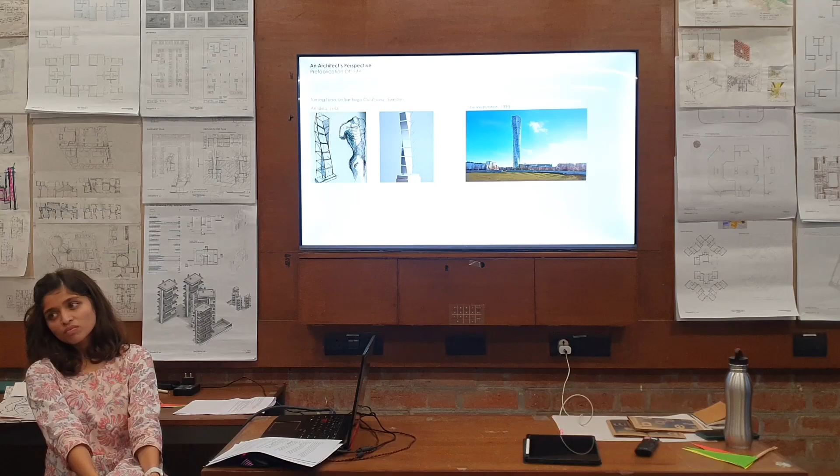This prefabrication thing, I feel, depends on what form it takes in my head. Is it in visual form? Because if it's in visual form, I'm going to stick with it for a much longer time. But if it's in sentence form, or some different sense, it will have a lot of different interpretations of the shape it's going to take. I think if it's not in a visual form, it will help make that thing very contextual. If an idea only exists in a verbal sense, maybe.

But somewhere we'll have to draw the line to say that will not be considered prefabrication. Because if I take one step further and say it's not even in verbal form, it's in the synapses of my neurons in the brain, then we'll say that actually nothing we do is new. Everything we do is based on our life experiences and some memories stored in our brain, and they are emerging. So if I go to that extreme, everything is prefabricated.

In philosophy, people get into this question. Some philosophers say that everything you do in your life is already predetermined by your past experiences, you are just not aware of it. But if we take it to that level, one could argue everything is prefabricated. So we'll have to say that maybe verbal ideas also, one doesn't know, maybe they need to be non-visual or non-final for it to be considered prefabricated.

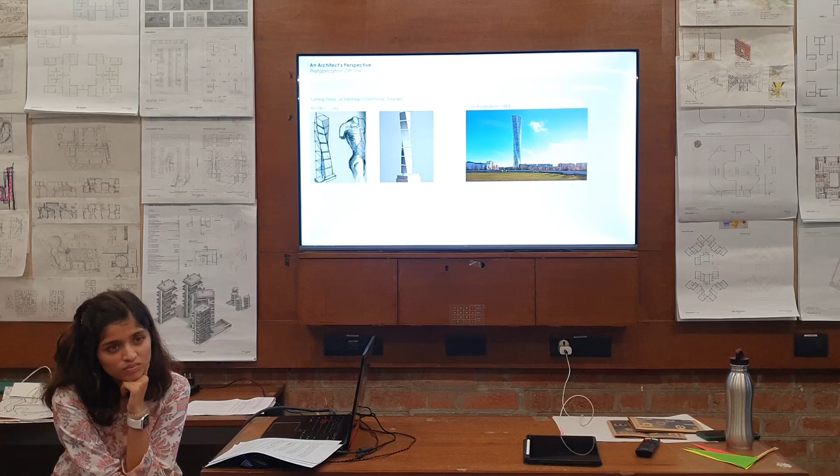So in that example where Zaha Hadid is doing the door handle, if she did not personally design the screw of that door handle, would I still consider the door handle to be designed by her? Or would I say it is partially prefabricated? Or if the metal she used was not invented or discovered by her, someone else's metal, that is also relevant. So somewhere in this handle we'll have to say, even if you are using a prefabricated, pre-designed screw, it is still not a prefabricated handle. I have to make some cut-off line.

Similarly, I would imagine for design also we have to make a cut-off. Even I am not sure whether the preparations you are doing for your time problem, how much of it is just preparation and how much of it is prefabrication. Because some of it might be preparation. So where is the analogy of the screw here? What of all the preparations that you are doing would you call prefabrication? That is the question we need to ask.

I would still like to go back to when you are talking of prefabrication in construction, you were talking of certain advantages and disadvantages. I think then the larger question is, if you are prefabricating an idea, what are the pros and cons of it? I am sure there are advantages and disadvantages. The disadvantage coming up in the discussion is that it is not emerging from specific contextual factors, it is emerging from generic contextual factors. Because when you are pre-designing for the time problems in this studio, you already know it is housing in Ahmedabad in 2023. So time as a context, climate as a context, geography, culture of people as a context, you are taking that into account. It's only the shape of the plot and the exact location of the plot that you are not taking into context. But one could argue that is a generic context, not a specific context.

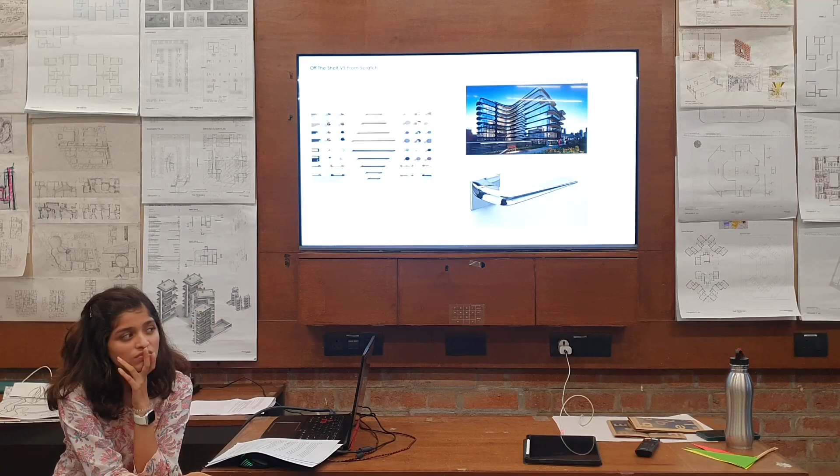So in this context it comes down to what are the off-the-shelf things you're using as-is, and what are the ones you're modifying? Right now it's put as a duality of off-the-shelf versus from scratch, whereas you're saying the prairie house is neither off-the-shelf nor from scratch, it is somewhere in between.

Picking up even the door handles when it comes to housing, it is not prefabricated because you are attaching the screw to the door on site. So if you start, there is that degree also.

True, and I think for the prairie house, the idea is off the shelf, but the manifestation of it is from scratch for every project. The idea of the horizontality and the rooms and its configuration is off the shelf. He did it for one entire region and said, I'll use this idea and keep repeating it again and again. But the lift and staircase is fully off the shelf.

But just for the discussion, if the rest of the floor plate is non-banal, would it bother you that the lift-staircase combo is banal? If the handle bothers, then I guess the lift and staircase would also bother.